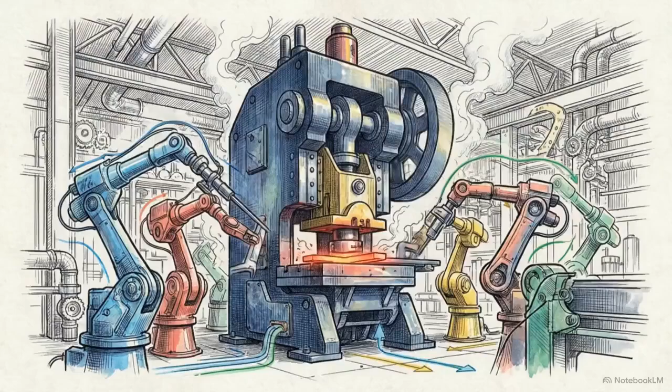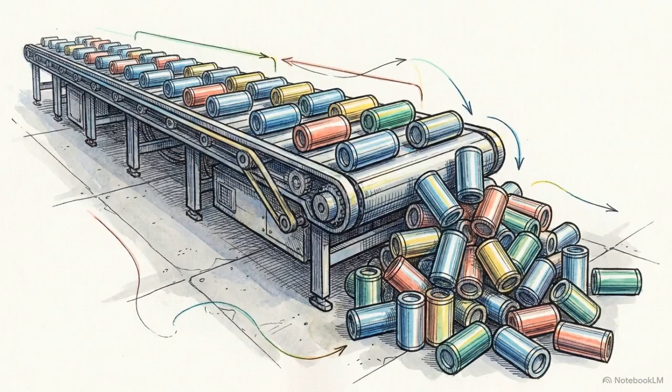A critical bottleneck machine sits at the center of the production line. Thousands of components pass through it daily. If it stops dead, the repair cost is only a fraction of the total loss. Idle labor piles up, materials back up on the line, customer deliveries are delayed. A single hour of unexpected downtime easily costs a facility tens of thousands of dollars.

Historically, factories manage this through three flawed strategies. The first is reactive maintenance, or run to failure. The organization simply operates the asset until it breaks. For a light bulb, that makes economic sense. For a high-speed industrial press, letting a $10 bearing shatter mid-cycle destroys the surrounding hardware and halts production entirely.

The second strategy is preventive maintenance. Facilities replace components based on a strict calendar or usage schedule. Technicians swap out perfectly healthy parts simply because 3 months have passed. This approach wastes labor, discards viable components, and still misses the unpredictable, premature failures that happen between scheduled inspections.

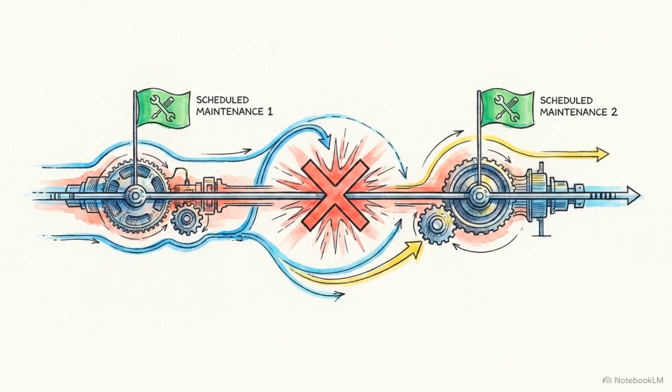The third approach is condition-based maintenance. A sensor triggers an alarm when a single metric crosses a hard limit, a temperature gets too high, or a vibration gets too rough. By the time that alarm sounds, the physical deterioration is usually obvious, and the machine is already on the brink of catastrophic failure.

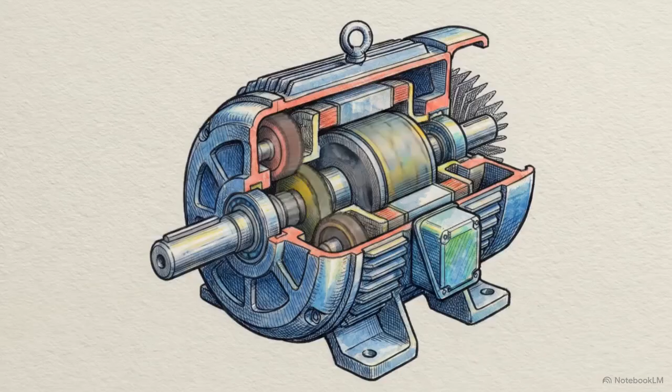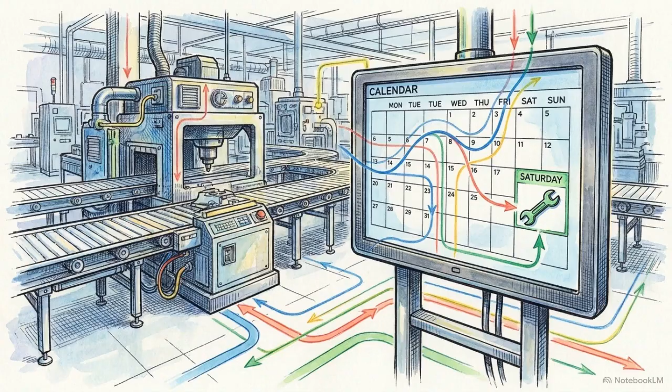Predictive maintenance eliminates these rigid choices. An artificial intelligence system simultaneously monitors multiple sensors, analyzing long-term trends and comparing variables. It detects a 1% change in motor vibration, interacting with a slight increase in electrical current, identifying micro-deterioration weeks in advance. The machine still requires repair, but by identifying the subtle patterns of early wear, predictive AI converts chaotic, unplanned downtime into a scheduled, controlled intervention.

A predictive AI model operates entirely differently. It detects the complex, low-level anomalies that appear right after point P, securing a massive early intervention window. The system might notice that a motor requires slightly more current to maintain the same output, while simultaneously producing a faint acoustic pattern at one specific frequency. Neither signal breaks a traditional alarm threshold, but together they map precisely to the early stages of a bearing fault.

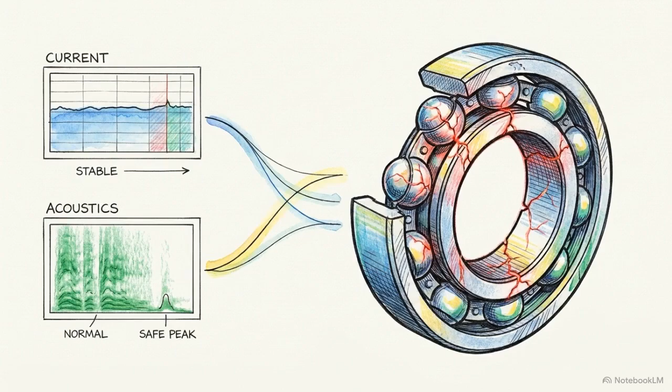The objective of industrial AI is not to predict the exact second a gear will shatter. The objective is to maximize the actionable warning interval so the facility can prepare.

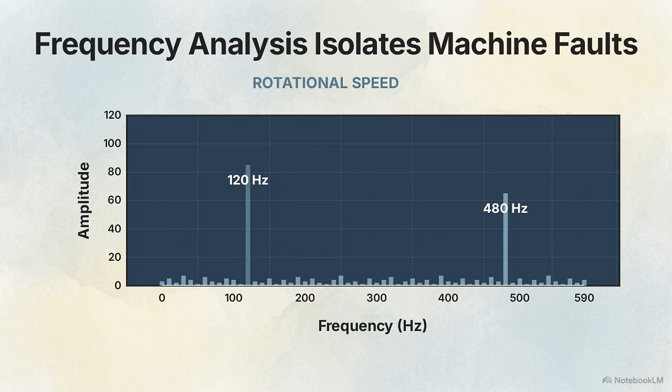To isolate specific problems, engineers apply a mathematical transformation, converting that messy time domain wave into the frequency domain. This separates the noise into individual mechanical sources. One distinct frequency peak maps to the general rotational speed of the motor. Another maps exactly to the specific geometry of a gear tooth or a rolling bearing.

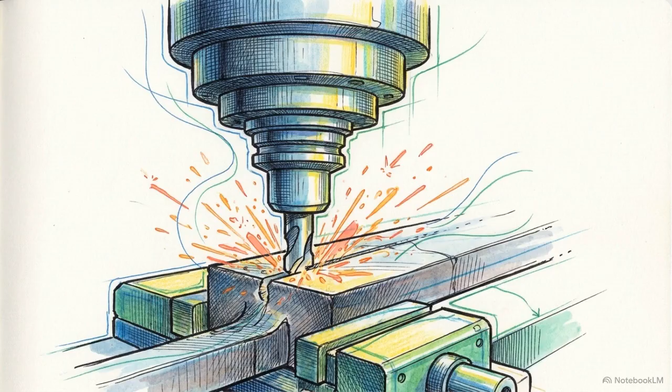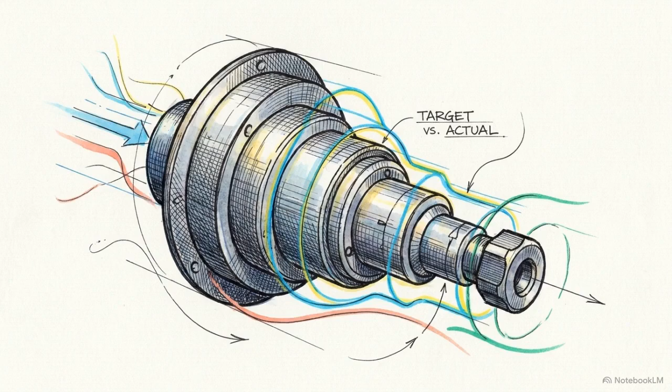Even clean sensor data can be completely misleading if isolated from the machine's operating conditions. If an asset is processing a heavier material, its temperature and vibration will naturally increase. A model examining those signals independently might trigger a severe alarm on a machine that is simply doing more work. Advanced predictive systems continuously compare the physical sensor data against the exact production load at that exact moment. They analyze what the machine is doing relative to what the machine is currently being asked to do.

Training these models introduces a severe statistical hurdle, known as the label problem.

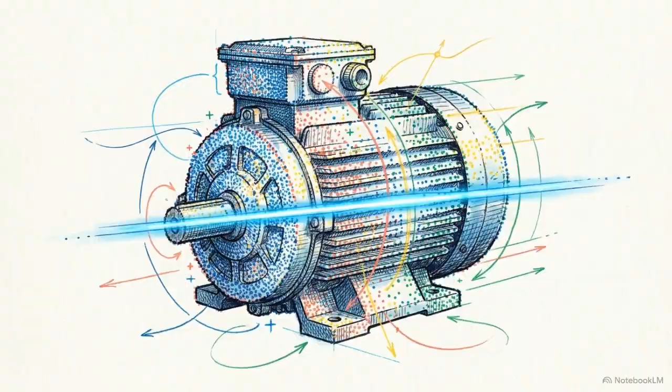while completely missing the few rare failures that actually matter. Instead, engineers deploy unsupervised anomaly detection. The system studies the massive volume of healthy data to learn the exact baseline of normal behavior. It doesn't look for a specific named fault.

It flags any complex deviation from that established baseline. These anomaly models are then fused with physical engineering principles. A hybrid model combines machine learning patterns with the strict mathematical laws of heat transfer, mechanical stress, and component fatigue. Relying purely on historical statistics leaves dangerous blind spots.

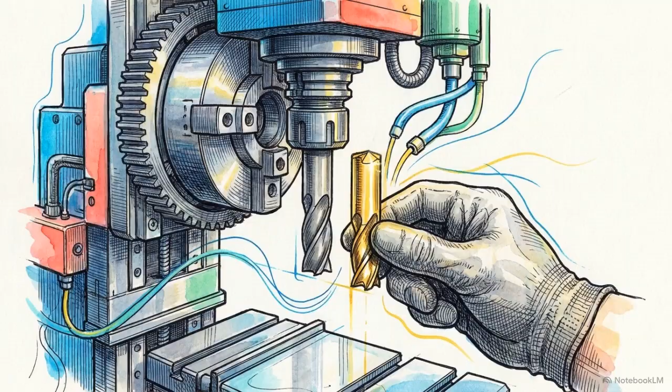True predictive accuracy requires anchoring the artificial intelligence to the actual physics of the machine. When a factory changes a material type, upgrades a tool, or increases production speed, the AI encounters conditions entirely absent from its training data. This causes domain shift, eroding the model's accuracy until it is recalibrated.

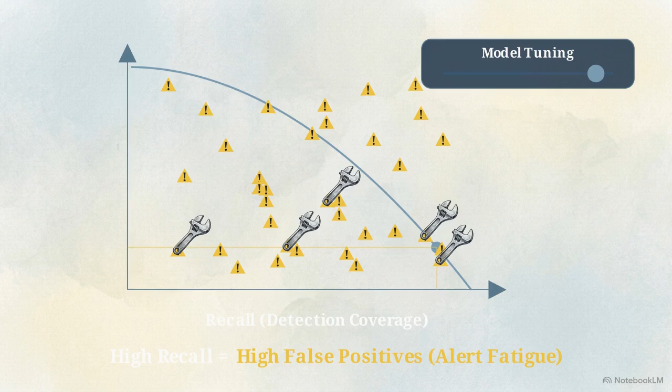This matrix shows a strict mathematical trade-off that every predictive model operates on: the balance between precision and recall. Pushing the model toward maximum recall ensures it catches every conceivable fault. The trade-off is a massive spike in false positives. The system floods the floor with unnecessary warnings, halting production to inspect perfectly healthy machines.

Pushing the model toward maximum precision guarantees that every alert generated is absolutely real. But this dramatically increases the rate of false negatives. The model stays silent, and a catastrophic breakdown occurs with zero warning.

If a poorly tuned system generates constant false positives, technicians experience alert fatigue. They start ignoring the low-value notifications. Eventually, they assume a genuine critical alert is just another glitch, and the machine is destroyed.

Generating a high volume of alerts is easy. Tuning an AI to deliver precise, actionable intelligence without overwhelming the maintenance team requires continuous operational discipline.

The predictive system must connect directly into the facility's computerized maintenance management system. A validated alert automatically checks inventory, identifies available technicians, and generates a structured work order. This workflow forces the facility to confront supply chain constraints.

An AI warning of a gearbox failure 4 weeks from now is useless if the required replacement part has a 12-week procurement lead time. Prediction dictates inventory strategy.

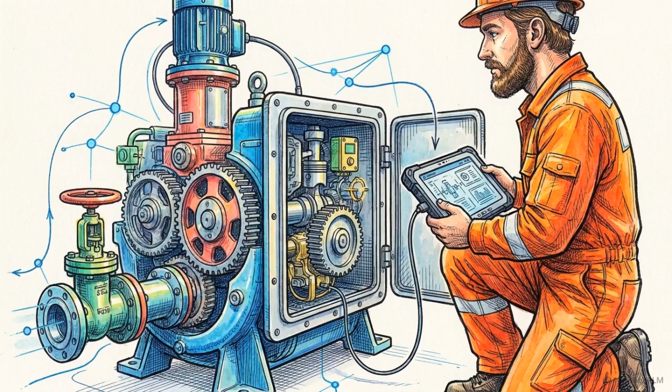When the technician executes the work order, they inspect the machine and record what they find. That physical confirmation, whether it was early bearing damage or a false alarm, is fed directly back into the AI to refine its accuracy. This process prevents automation bias.

If technicians blindly accept a high-confidence AI diagnosis of a failed bearing, they stop investigating. They might swap the bearing, entirely missing that the actual root cause was a loose concrete foundation causing the vibration.

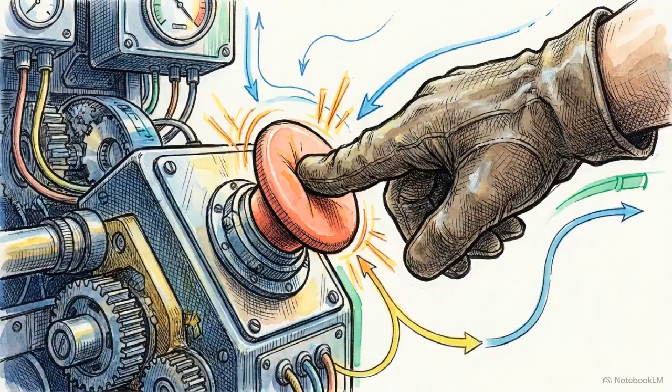Human override must remain absolute. Reliability engineers require the authority to reject a prediction, request a manual inspection, or halt production entirely if a hard safety limit is breached. The most advanced industrial maintenance program is not the one with maximum algorithmic autonomy.

It is the architecture that seamlessly fuses clean sensor data, statistical probability, and experienced human judgment to act decisively exactly when it matters most.